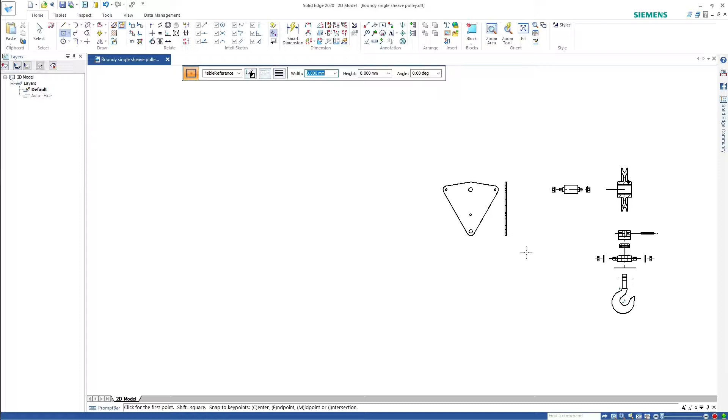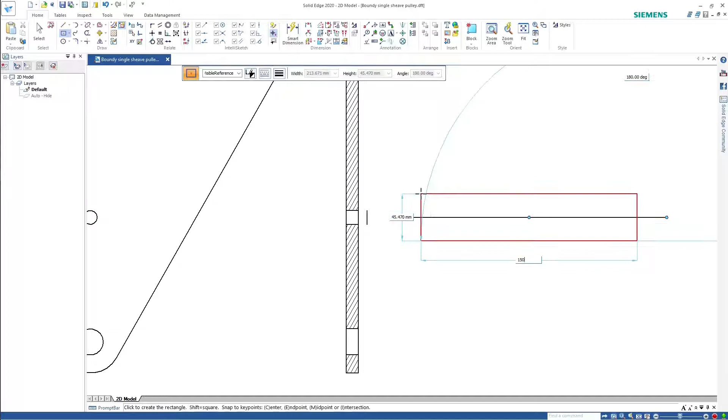Let's draw the spacer in line with here. It's 150 long by 12, tapped at 20mm both ends. So we just draw a rectangle. There's a centre mark. The spacer is 150 by 12. Done.

And we'll go to our M12 by 1.75. So we'll need to come in half of 1.75, which is 0.875. Let me just set that to chain: 0.875.

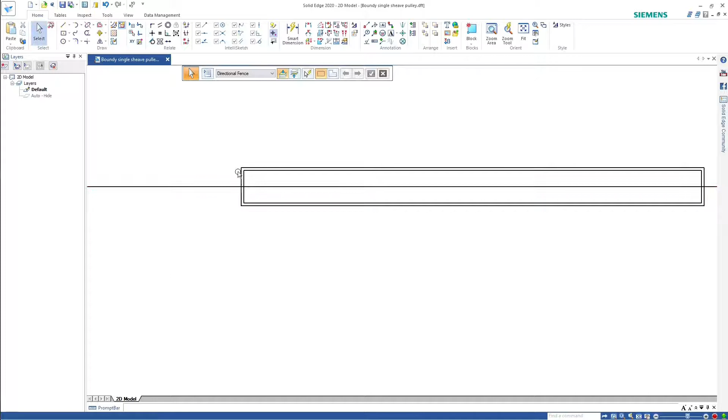Now I'm going to offset that because we're coming in 20mm. I'll just draw one end and then worry about the other one later. Just looking at the dimensions, M12 by 20 means it's 20 deep. So we want a single line, 20mm across to there.

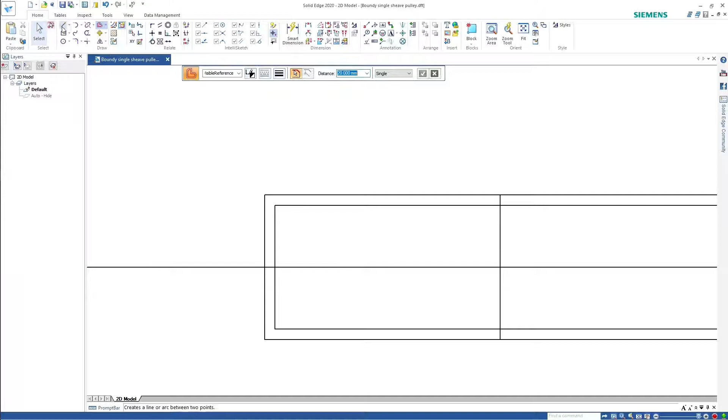Now we're going to select that one and its two friends and turn those into a thin line. While I'm at it, let me turn that into a centre mark. That one there is a thin line.

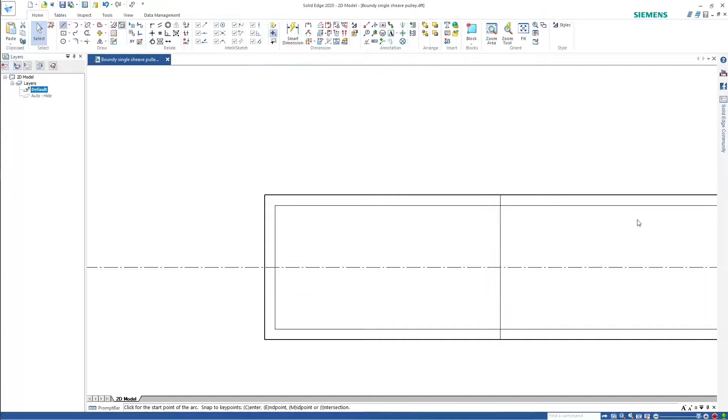This is the thread form I'm drawing. That comes up at 30 degrees. This one comes down at 30. I'll do that.

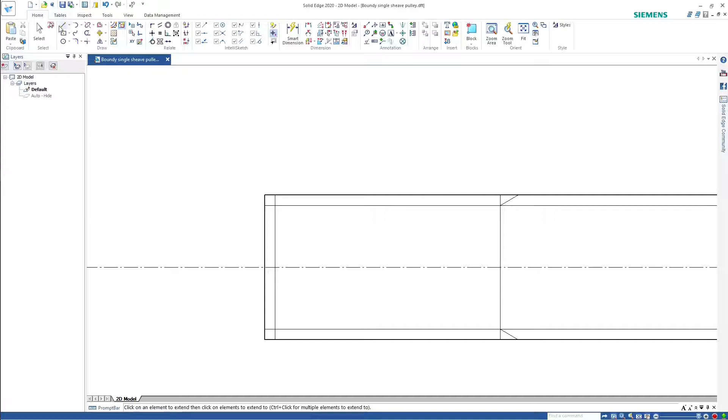That of course gets extended out like so. This now gets trimmed across and cleaned up.

So now I'll just select all my work on this end, delete them, select all my work on this end again and just reflect it. There it is, miles outside. And now I just move it across.

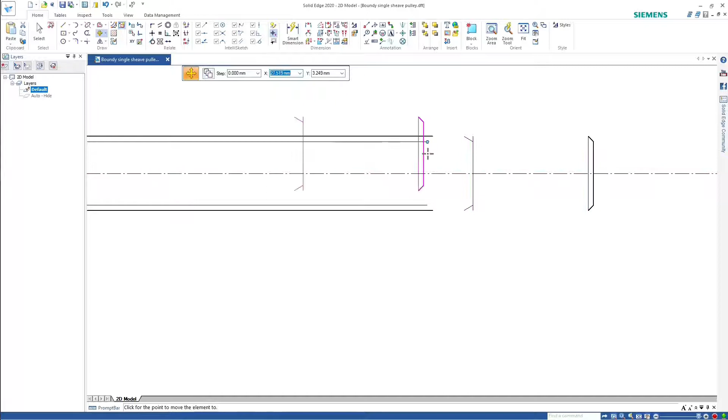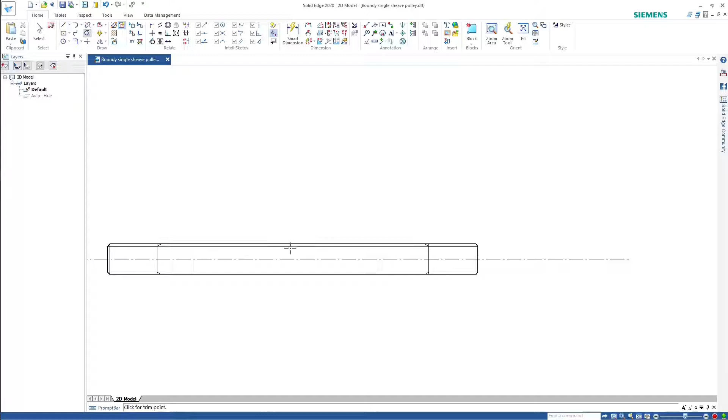And now I can delete the thread form that's not there. So there's the center pin drawn.

I need a 12mm ID pipe, 100 long. So let's just go check how thick is a standard pipe with 12mm inside.

Metal, steel. Normal dimensions of steel pipe, Atlas Steels, carbon steel, SCH 10 would do it. What schedule means is the bigger the number, the more pressure it takes. 2 times 1.65 is 3.3mm, so that's going to be around about 13.5mm internally.

So we're going to be 17mm on the outside. I need something that's just a touch over 2.5 to take it back down to 12mm. Look, that's going to have to do it.

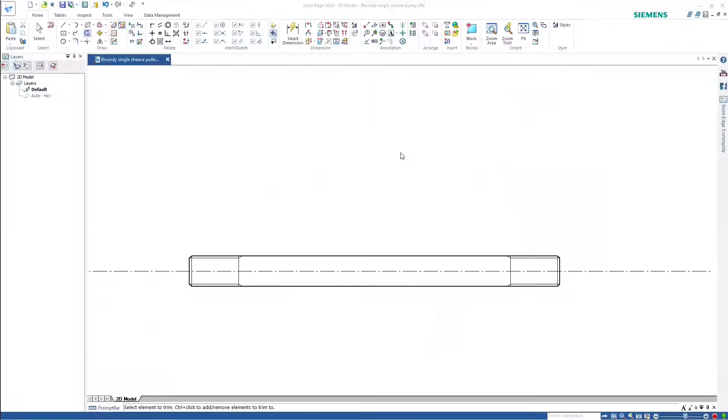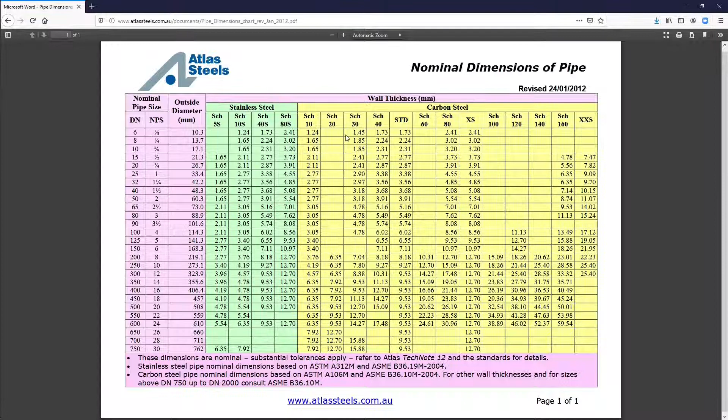17.1 outside diameter with a wall thickness of 2.31 mils. So we're going to go from here: 17.1 millimeters outside diameter by 100 long with a wall thickness of 2.35 mils from memory... 2.31 mils. So, 2.31.

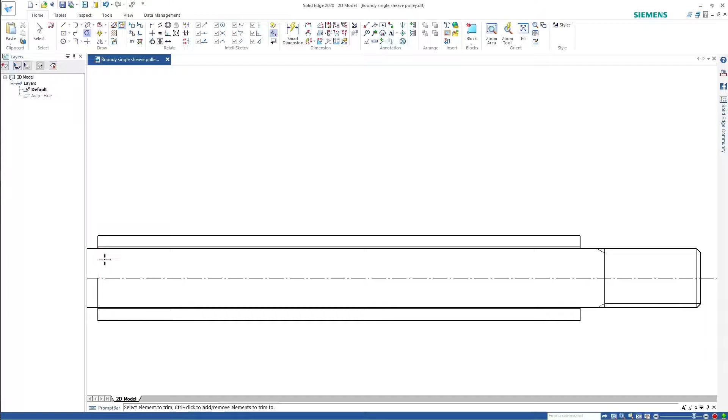Okay, so there is our pipe. Let's now section it. The bolt, it's really a stud because it's threaded both ends. The stud is not sectioned. Fasteners are not sectioned when they're cylindrical in cross section. The pipe, however, is. And the pipe is section, let's pick a different number, 120.

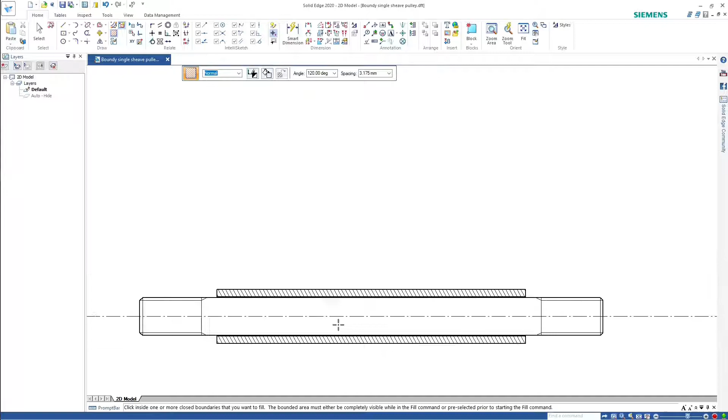Done. So there is almost every single part of our pulley drawn. The only thing I need to do is draw up the nuts for this. To draw up the nut, let's just...

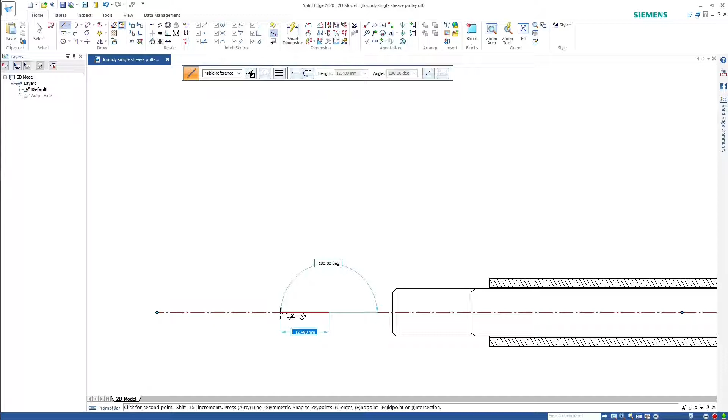Make a line here. It is 12 mil nominal diameter. Nuts are 0.8 thick. 0.8 times 12 is 9.6 mil.

The offset on this, I'll use the computer to do it. I'm going to offset that 0.45 diameters. 0.45 times 12 is 5.4.

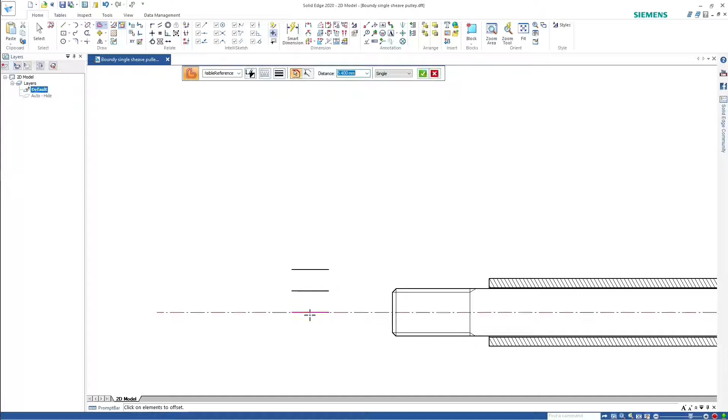That goes there, that goes there, and that's there, and that's there, and that is done. Okay, so there's our nut, and we'll have to put a washer on that as well.

Once again, I don't think you want the cheek plate falling apart, so we'll draw in a spring washer, which is drawn the same as a standard washer. There you go, I've got the center mark picked.

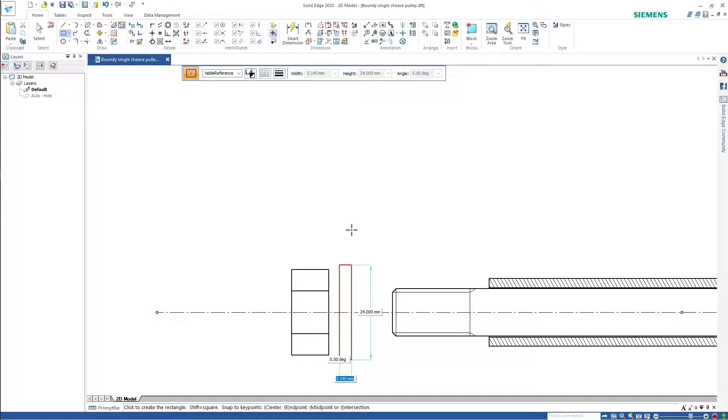Washers are 2 times diameter, 2 times 12 is, in this case, 24 mil, and they are 0.15 thicknesses. The answer is 3.6, but let's type it in. 0.15 times 12 equals... oh, I was wrong, 1.8, because I'm glad I triple checked.

There's the washer. To make it into a spring washer, that is just a bog standard mild steel engineering washer. To make it into a spring washer...

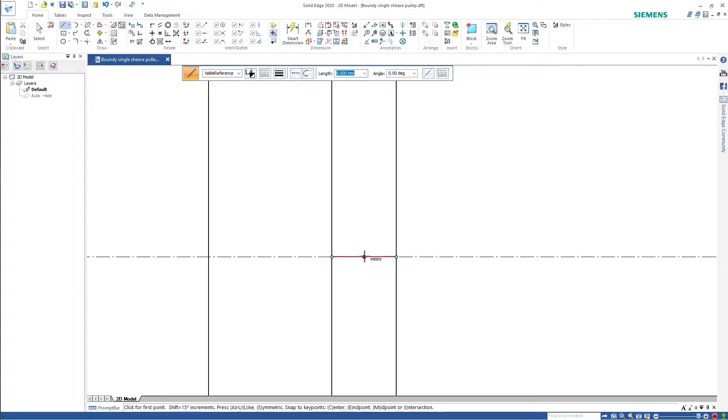Let's just draw a line across at 45 degrees, like so. There is a spring washer drawn.

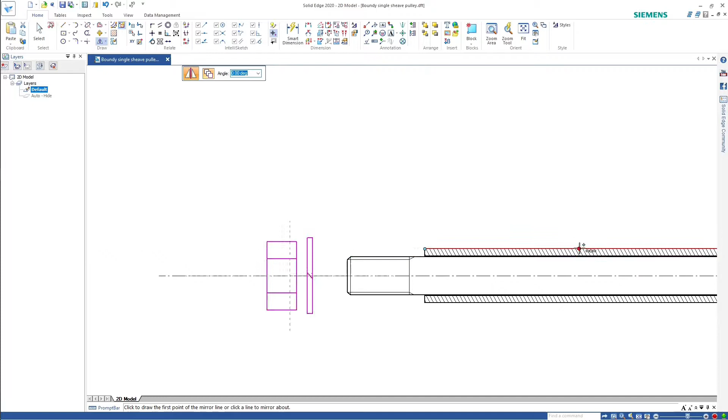I'll just mirror them. Should be able to just pick a mirror point now quite happily. Done. So there's a spring washer. There's everything, and we are drawn.